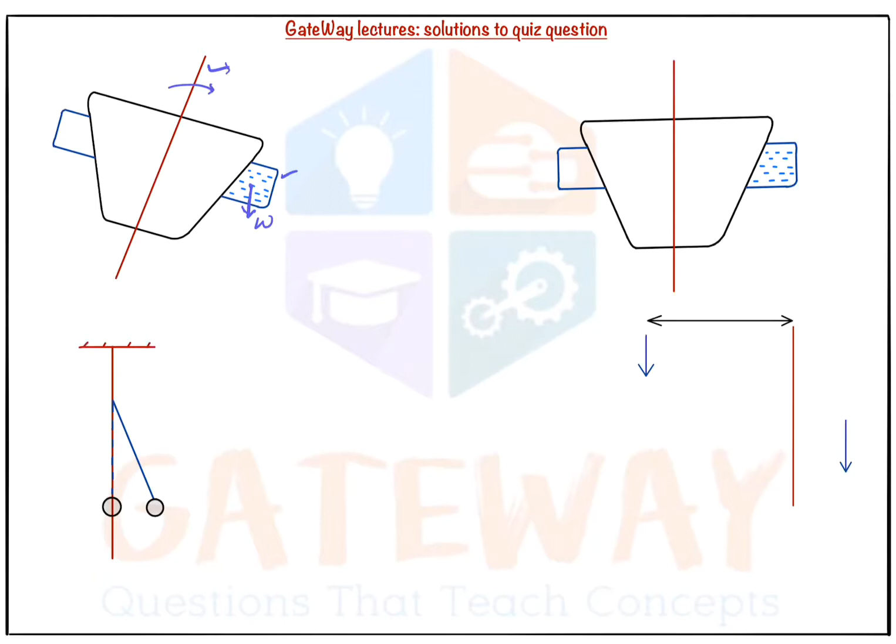The W load is acting due to the water being added. So in a ship there will be something called balancing weights, balancing masses. Those will be placed in the ship to balance this weight, and to avoid the ship completely toppling in this direction, we will add the balancing masses here.

That balancing mass weight also should be equal to W. But why should we add this balancing mass? To just shift the center of gravity.

Now see this condition: this plumb line is attached to the ceiling, and this is the plumb bob. Whenever the ship tilts in this direction, here it will be G. The original center of gravity will be somewhere here, and this is the original metacentric height.

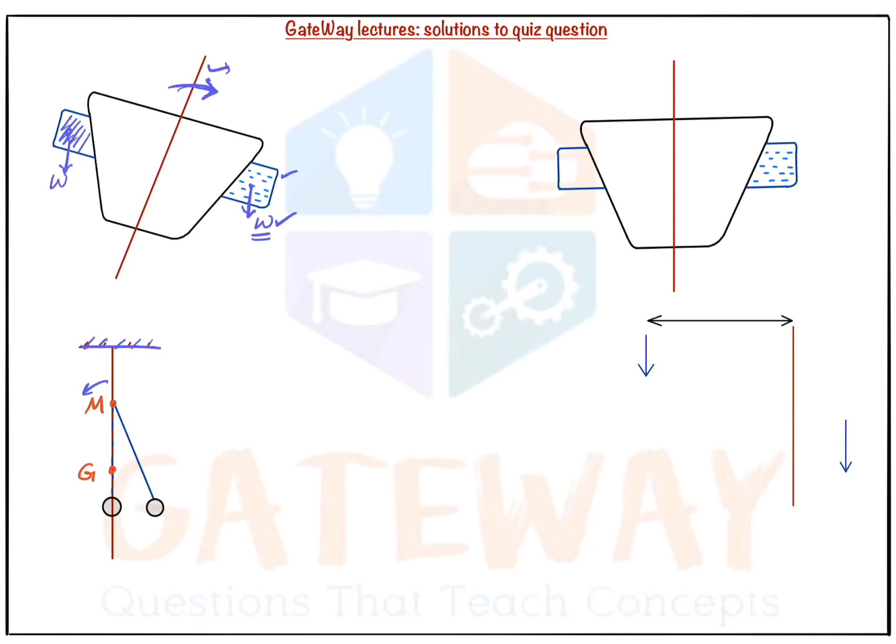Now whenever the bob shifts to this direction, the G also shifts to a point here, and that point is G dash.

So the G varies with the metacentric height, and here this angle given is theta, and this is also angle theta. This is the plumb line shift. The plumb line, nothing but the string, shifts by angle theta, and also our center of gravity will shift from the metacentric height.

Whenever the ship floats, it always tilts about a point, and that point is the metacentric height - that is the actual definition of metacentric height. So here also the G will tilt about the metacentric height, which is fixed. So the G changes with respect to metacentric height to a distance of G dash, shifting to a point called G dash.

Now the complete center of gravity of the body is here, so there are more chances that the ship might topple.

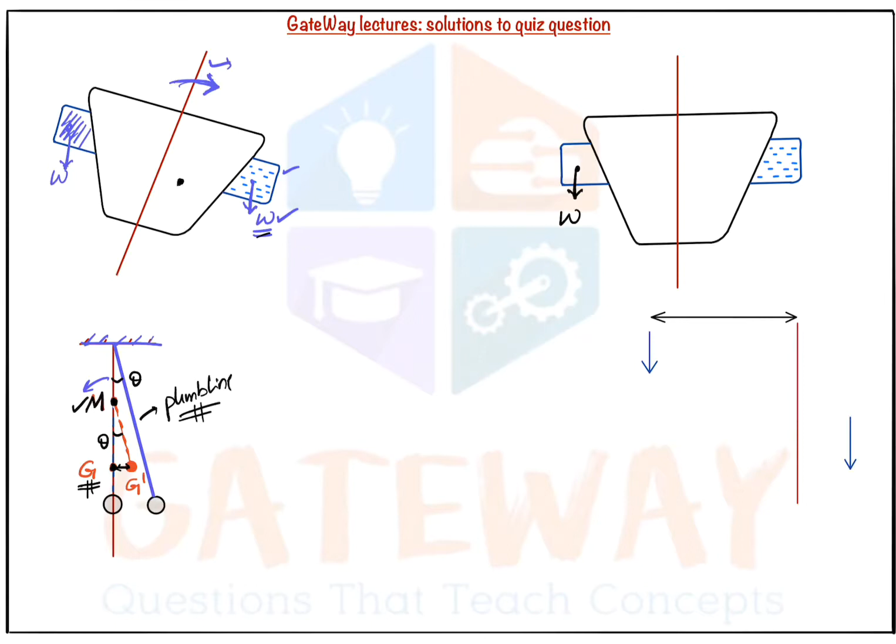So to make it balanced, we attach another weight equal in magnitude to this small w in the opposite direction. In the question, the distance was given as 10 meters from the center of the ship. So now we've added the w weight at a distance of 10 meters.

Here is our G dash, and here is our G. This is our reference axis, just to maintain the moment balance between these.

Whenever G is shifted to G dash, at G only 8,000 tons is acting, but at G dash, 8,000 plus 25 tons of water weight is also acting. This W we are adding is already part of the 8,000 newtons - it is in the ship, they are the balancing masses. So 8,000 plus 25 tons of weight is being added, and this value is equal to 25 tons.

So how will we proceed mathematically? If you observe, let this point be A, let the bob's initial position be B, and this position be C. Now we will apply...

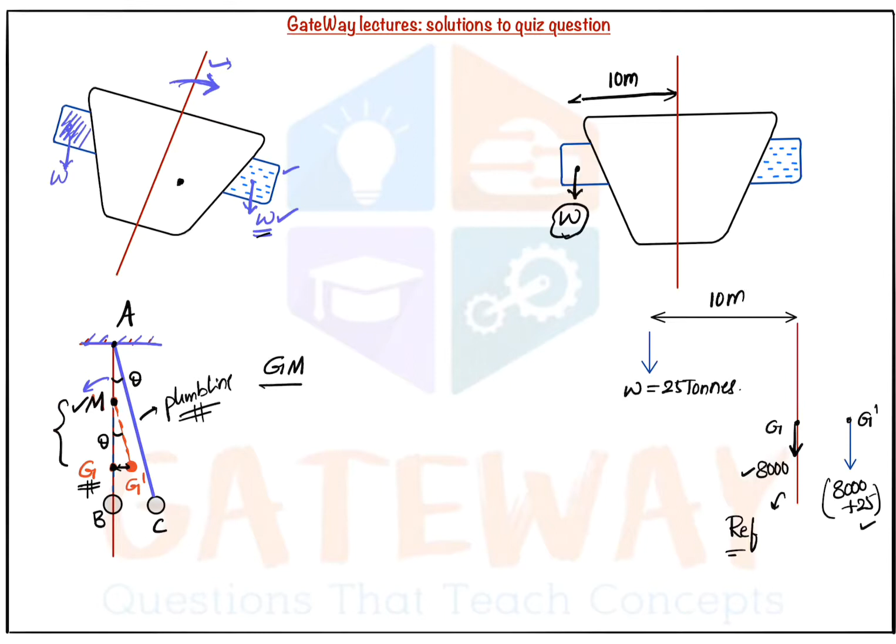GM, nothing but the original metacentric height, upon GG dash, the shift in center of gravity, is equal to AB by similar triangles method, AB upon BC, and this total is equal to 1 by tan theta. If you apply tan theta, you will get the same relation.

Now we need GM and GG dash. Here AB and BC are not known - no dimensions were given. We just need to calculate GM using GG dash, so we can calculate the position of GG dash. From this, GM is equal to GG dash upon tan theta.

Now we will calculate the GG dash value. This is the GG dash. In this question, we will take moment about the reference axis.

Moment about reference axis, this is our reference axis. We'll take moment about that. Here on the left hand side, you can see small w into 10 meters is equal to, on the right hand side, 8000 plus 25, nothing but 8025 into GG dash.

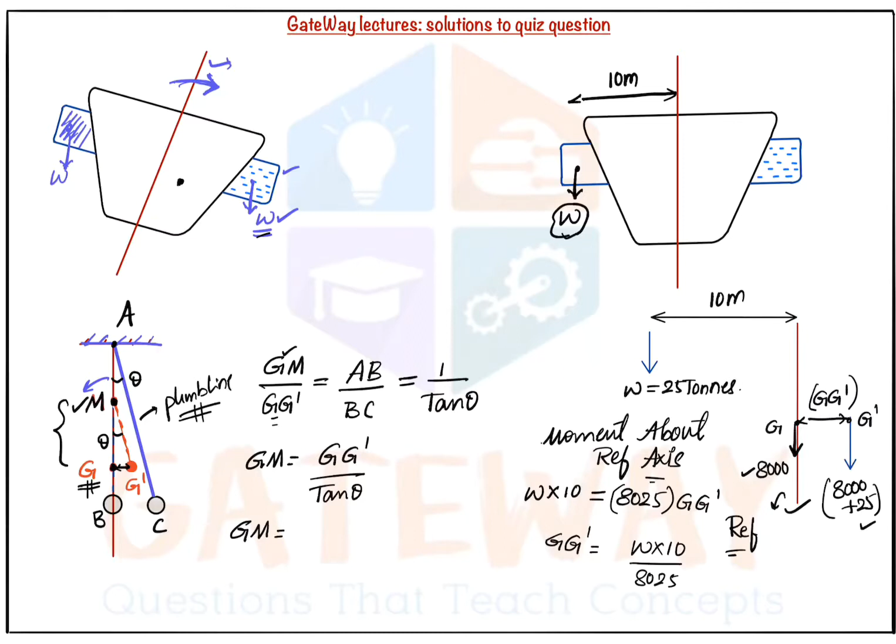So we need to get the value of GG dash from that. W into small w into 10 upon 8025. Here we'll substitute the value of GG dash to get the GM. GG dash is nothing but small w, the value of small w is 25 tons into 10 meters is the distance by 8025 into tan of, the angle was given as

4.87 degrees, tan of 4.87 degrees. So from this we'll get the value of GM, and that value we are getting as 0.36563 meters. This is our answer.

This is a very simple question. Just you need to know the concept of plumb line, what exactly is plumb line and how to get the value of GG dash. That we will be doing it by adding a balancing mass of small w on this side to balance the moment produced by shifting of the center of gravity.

By shifting the center of gravity, there will be a moment produced. To balance that moment, we will be adding an additional small w weight, that is the balancing mass, on the other hand side, to make the ship reference axis vertical.

Next question. The components of velocity in a 2D frictionless incompressible flow are u is equal to t square plus 3y square and v is equal to 3x square. Seeing the question, we can say that the velocity u comma v both are the functions of space and time.

So here our acceleration varies with space and also with time. Our acceleration will have two components here. One will be the convective acceleration component, the other will be the local or temporal acceleration component. For doing that, it is a two-dimensional, and also u and v are given.

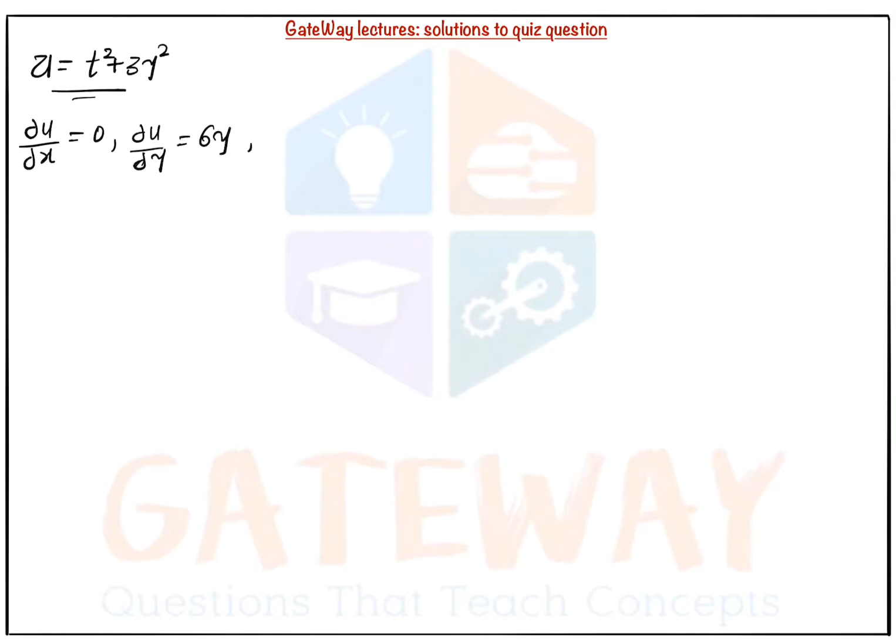So initially we will calculate all the values. For given u is equal to t square plus 3y square. First dou u by dou x, there is no x component, so 0. And dou u by dou y, it is nothing but 6y by differentiating that u. And next dou u by dou z, there is no z component, 0. And dou u by dou t, it is 2 times of t, 2t.

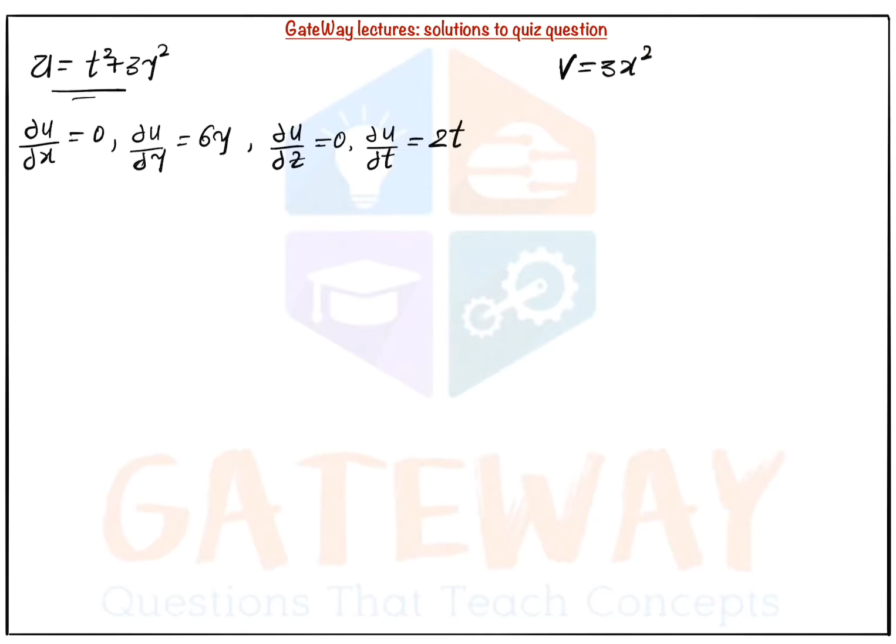And next v is equal to 3x square was given. Then dou v by dou x, 6x. Dou v by dou y, 0. Dou v by dou z, 0. Dou v by dou t, 0. Because there is no y component, there is no z component, there is no time component.

Now we will substitute these values in ax. Ax is equal to u into dou u by dou x.

So u is nothing but t square plus 3y square, into dou u by dou x, which is 0, plus v into dou u by dou y. V is nothing but 3x square. So 3x square into dou u by dou y, which is 6y. Plus, anyhow, w is 0. W component is 0.

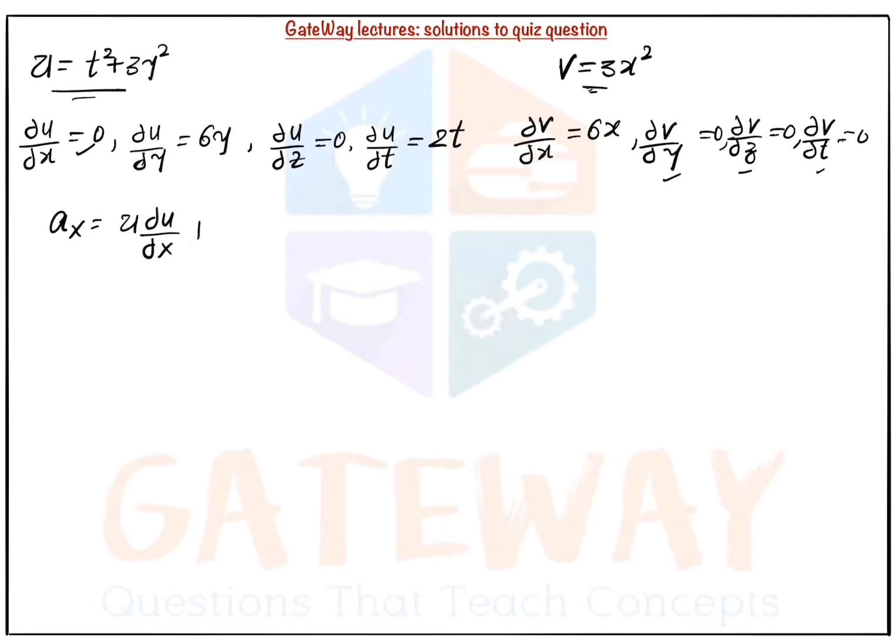Here I'll just write the formula again so that you will not have any confusion. Ax is equal to u into dou u by dou x, plus v into dou u by dou y, plus w into dou u by dou z, plus dou u by dou t.

Here dou u by dou x is 0, so this component gets 0. Here v is existing, dou u by dou y is also existing. Then v is 3x square into dou u by dou y, and here we got it as 6y. And w is 0, dou u by dou z is also 0. Dou u by dou t is 2t. Therefore, plus dou u by dou t is 2t. Therefore our ax, we got it as 18x square y plus 2t.

Keep it aside. Similarly, we will find the value of ay. Ay is nothing but u into dou v by dou x, plus v into dou v by dou y, plus w into dou v by dou z, plus dou v by dou t.

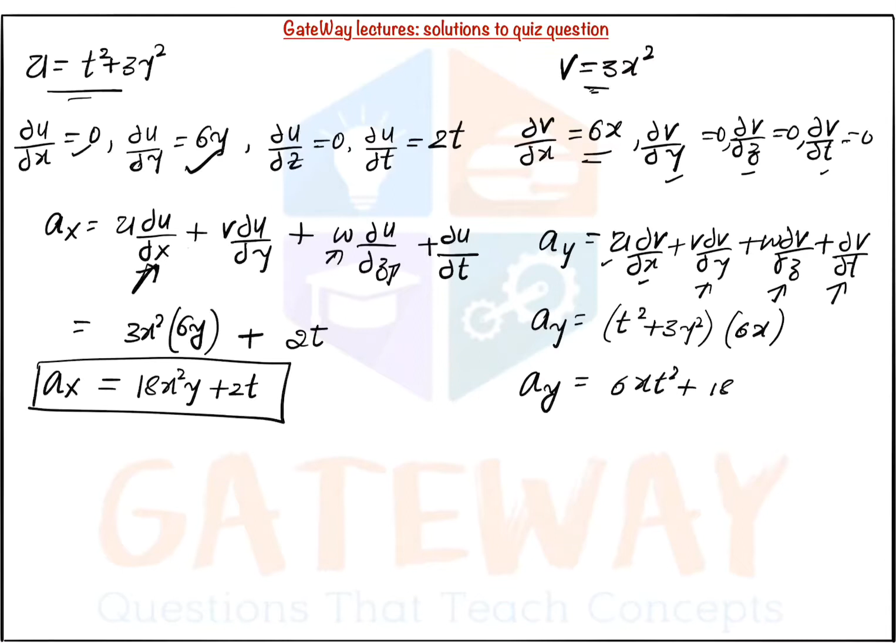Here u is known, dou v by dou x is known, and dou v by dou y is 0, dou v by dou z is 0, dou v by dou t is 0. Therefore ay is equal to u, which is t square plus 3y square, into dou v by dou x, which is 6x. When you simplify this, we'll get the value of ay as 6x t square plus 18x y square.

We need to calculate at the points 1, 0 and t is equal to 0 second. You substitute 1, 0 and t is equal to 0 in both this condition, in both ax and ay. If you substitute in ax, we will get it as 0 because here y is 0, so the y component will be 0, and t is 0, so that will be 0. So ax is equal to 0.

If you substitute the same point in ay, here t is 0 and here y is 0, so here also we will get it as 0. Therefore, the resultant is nothing but 0 meter per second square, and this is our answer.

Next question. In an experiment, the following shear stress and time rate of shear strain values are obtained for a fluid. We don't know exactly what the fluid is, but we did an experiment with the shear stress and time rate of shear strain, and we got a few coordinates. At shear stress of 1 kilopascal, we have a rate of shear strain of 0. And at shear stress of 3 kilopascals, we are getting a rate of shear strain of 2. Similarly in that way. So now we'll do this question.

Before that, we need to understand, if you observe, there is no linear relation between the variation. Here the variation is not linear. 1 and 0, 3 and 2, having no relation, we can't coordinate. Suppose here we are having 1, and here we are having 1; here if we are having 2, and again here if we are having 2; here if we are having 3, and again here if we are having 3 — then we can say that the time rate of shear strain and shear stress are varying linearly. So for linear variation, nothing but directly proportional variation.

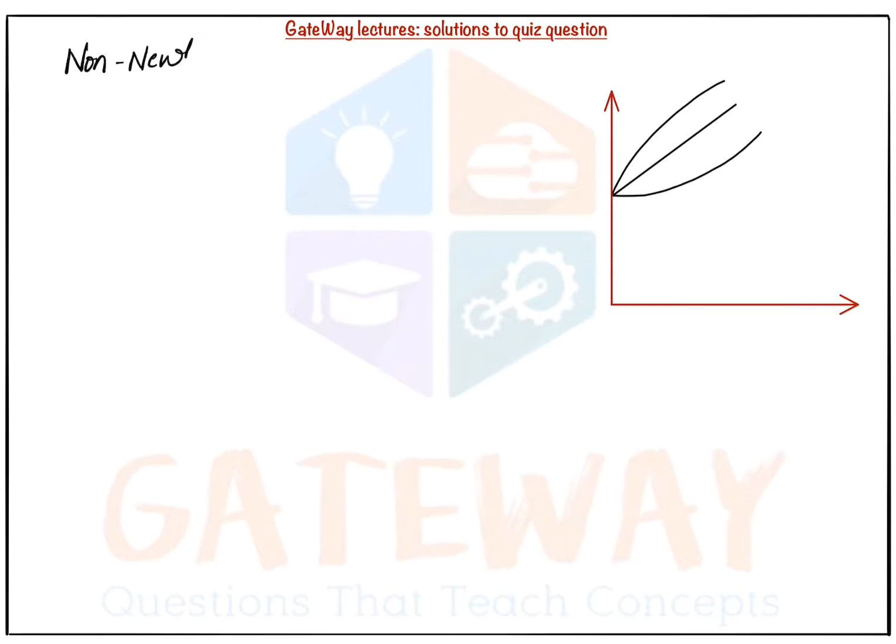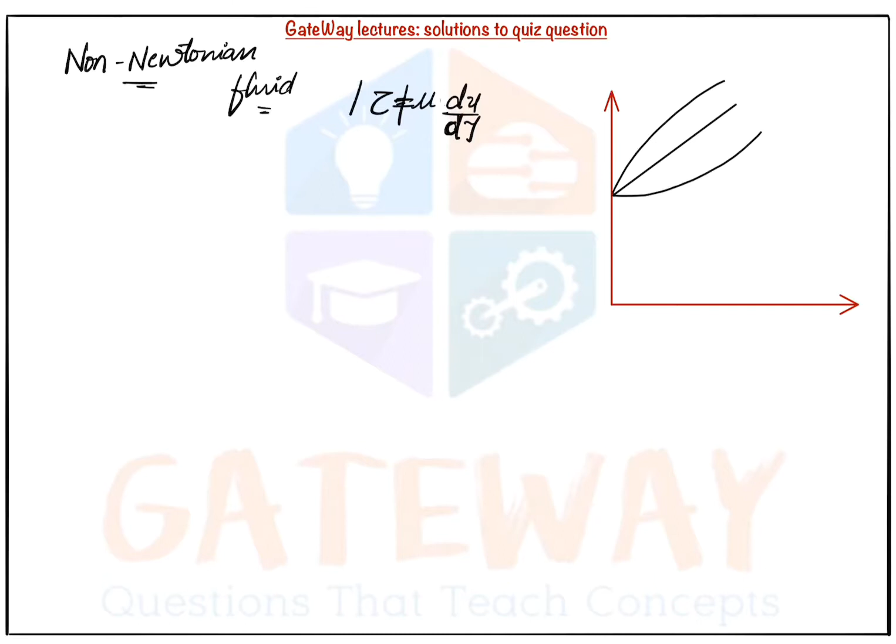So, non-Newtonian fluid — it doesn't obey tau is equal to mu into du by dy. It doesn't obey that. So if it doesn't obey this, then there should be some relation that it obeys instead. That is nothing but tau is equal to tau naught plus mu into (du by dy) whole power n. Here du by dy is called the rate of shear strain, or else it can also be called the velocity gradient.

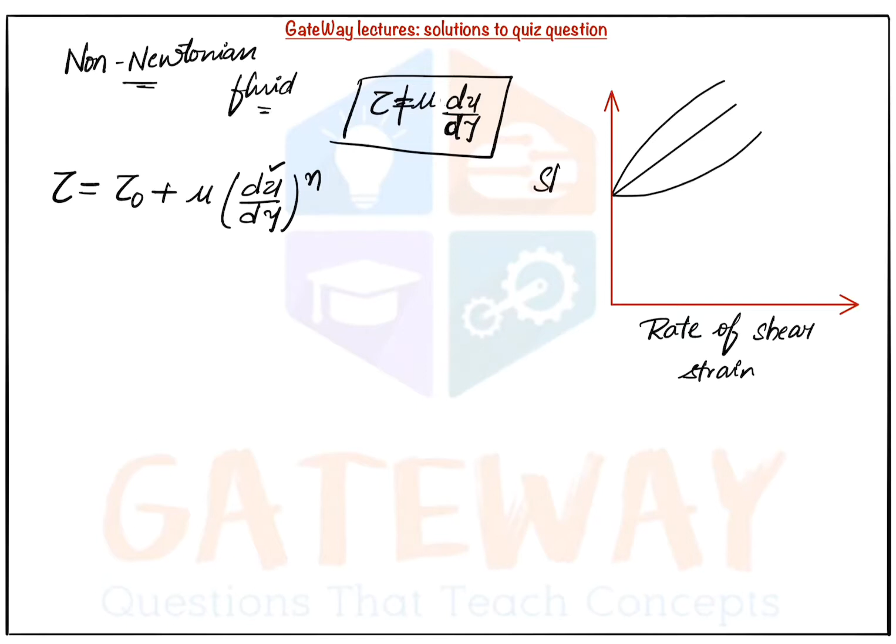Now generally when we do the experiment, we'll also make many plots. So here also we will make one plot. Scientists did experiments and they made a plot between rate of shear strain on the x-axis and shear stress on the y-axis.

For non-Newtonian fluids, scientists identified three types of curves. One is called the ideal plastic curve, and the value from the origin is called tau naught - that is, from the beginning it has some initial shear stress. In our question also, even at rate of shear strain being 0, there is an initial shear stress tau naught not equal to 0, given as 1 kilopascal. So there is a tau naught existing, and through experiments scientists got three types of curves for these non-Newtonian fluids, initially having some shear stress: this curve is called rheopectic, and this curve is called thixotropic.

More on this we will discuss in the concept series, or you can reference a standard textbook. But for this question we need only this information, and in our question the data, the coordinates, were given. Now we will calculate slope at each point. We know how to calculate slope between 2 points - suppose there is a line passing through 2 points on a curve, so how will we calculate it? If the points are x1, y1 and x2, y2, how will we calculate the slope?

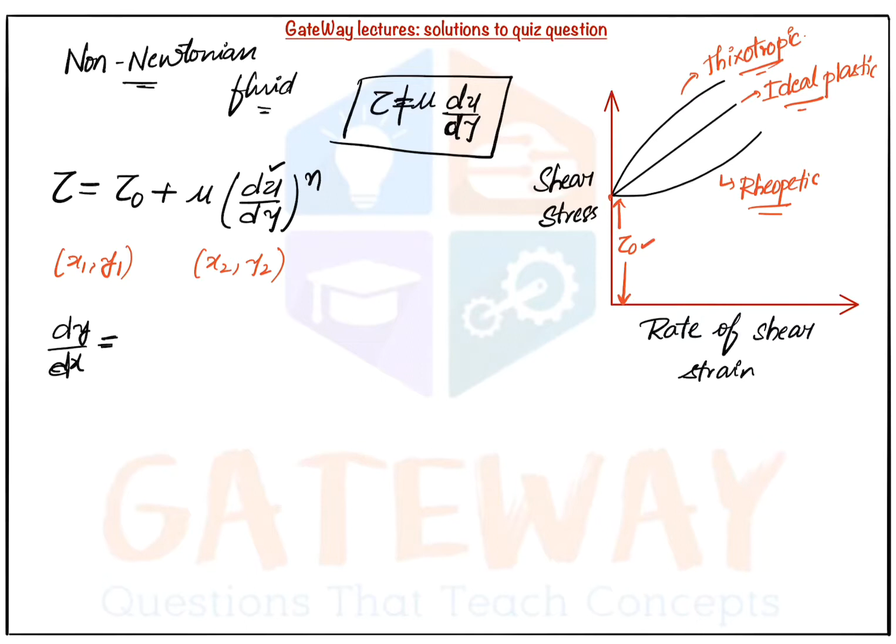Slope is nothing but dy by dx. Here these are defined variables, so we can write them as delta y upon delta x - that is, between 2 points. When we know 2 points on a curve, slope can be written as y2 minus y1 upon x2 minus x1. In the same way, same pattern, we will find the slope between all the 2-point sets.

This is one of our 2-point sets, this is another 2-point set, and this is another 2-point set. All these points lie on the same curve, so we need to calculate slope 3 times. This is our first slope, this is our second slope, and this is our third slope. So we'll calculate the first slope and name it slope 1.

Slope 1 we can calculate as y2 minus y1, that is 3 minus 1, because here y is nothing but shear stress - we take the shear stress component as y and the shear strain component as x. So y2 minus y1 is 3 minus 1, upon x2 minus x1 which is 2 minus 0. That gives us 2 upon 2, which is 1. Similarly, slope at 2 is...

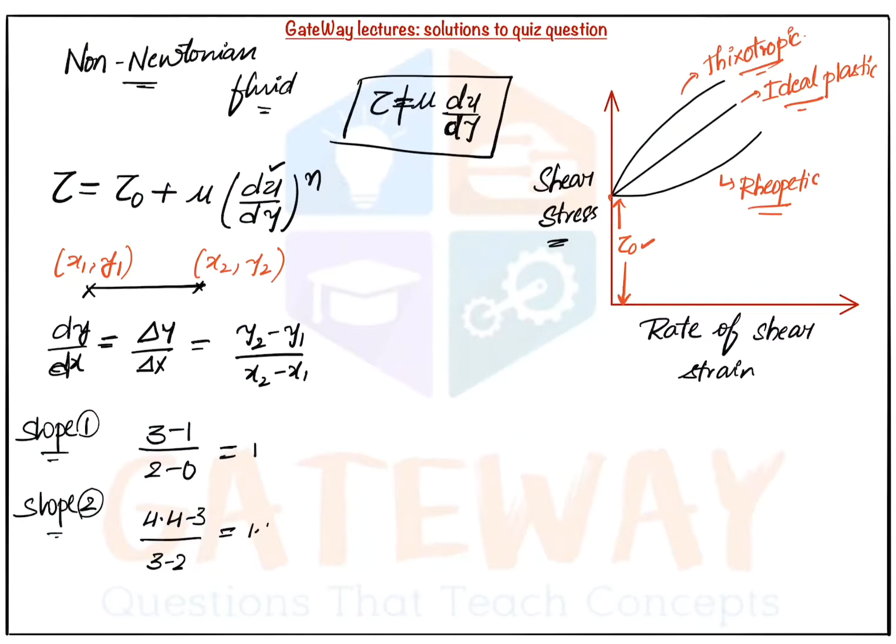4.4 minus 3 upon 3 minus 2 - these are the points. 4.4 minus 3 upon 3 minus 2, and that value we get as 1.4. Similarly, slope at the third point is 6.3 minus 4.4 upon 4 minus 3, and that value we get as 1.9.

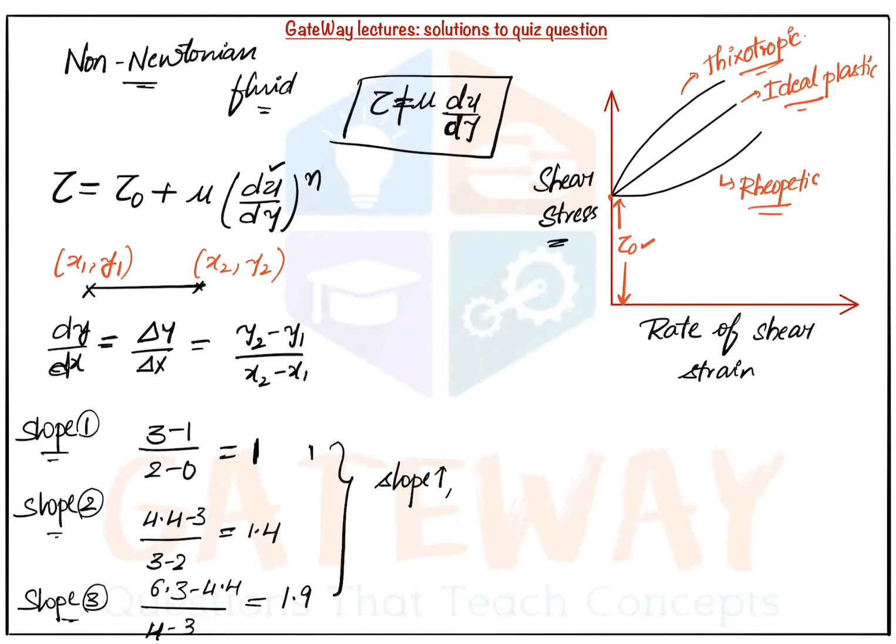So these were the slopes here. If you observe, between each and every point, our slope is increasing. Is it increasing linearly? What does it exactly mean by linearly? Suppose if it is 1 here, then it should be a multiple of that here - or if it is 2 here, then here it should be 4, and here it should be 8. It should have some multiple relationship. But here, if you observe 1, 1.4, 1.9, they don't have any multiple relationship. Therefore, the slope is increasing, but in a non-linear fashion.

Slope is increasing in non-linear fashion, and also for the given condition, tau naught is not equal to 0, and tau naught is nothing but 1 kilopascal. So here is our tau naught value - this is our tau naught, 1 kilopascal.

Now we'll observe the 3 curves here. First, the ideal plastic curve - in the ideal plastic curve, the slope is actually constant. Next, if you observe thixotropic - in thixotropic, the slope at each point is decreasing, so for thixotropic, slope decreases from point to point. But in rheopectic, if you observe, the slope is increasing.

And also it is a curve, it is not a straight line. The slope is increasing, and that is also increasing in a non-linear fashion. Therefore, for our given data and tau naught not equal to 0, our answer will be rheopectic fluid.

What does actually happen in rheopectic fluid? In this fluid, if you can observe, for a small change in the shear stress, there is a large change in shear strain, rate of shear strain. So a small change in shear stress causes a large change in rate of shear strain.

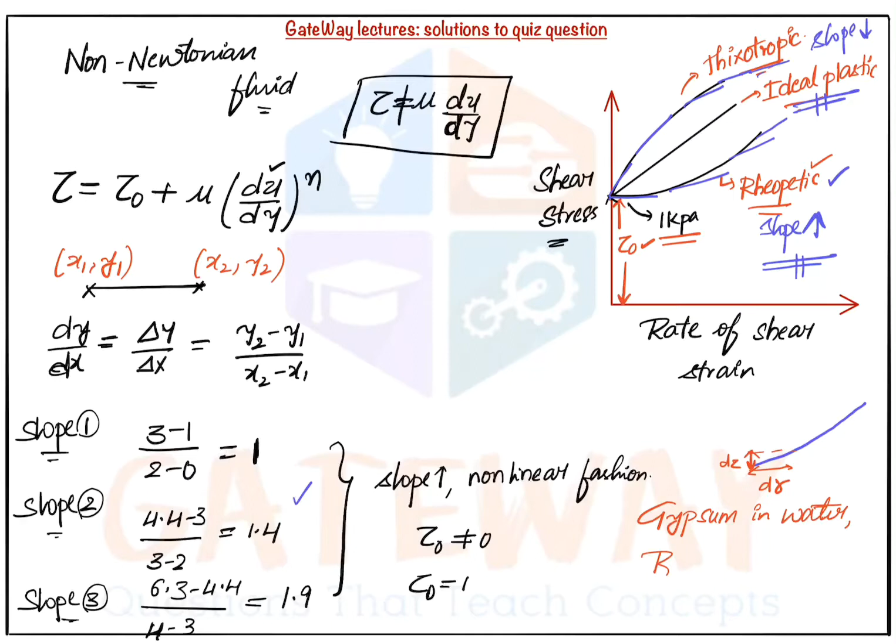And generally we take an example of gypsum in water, and also bentonite solution. These both are examples of rheopectic fluids.

Going to the next question. Question number 4: For the given arrangement, the pressure difference between A and B is - take g equal to 10 meters per second square, and all dimensions are in centimeters. If you observe, it is a case of manometer, and to be exact, a differential manometer.

We need to calculate the pressure difference between two fluids. Here we are having a pipeline carrying fluid A, water, at some pressure and some elevation. And here we are having pipe B, also carrying water, at some pressure and some elevation. We need to calculate the pressure difference between them using the setup of this U-tube manometer, or inclined U-tube manometer.

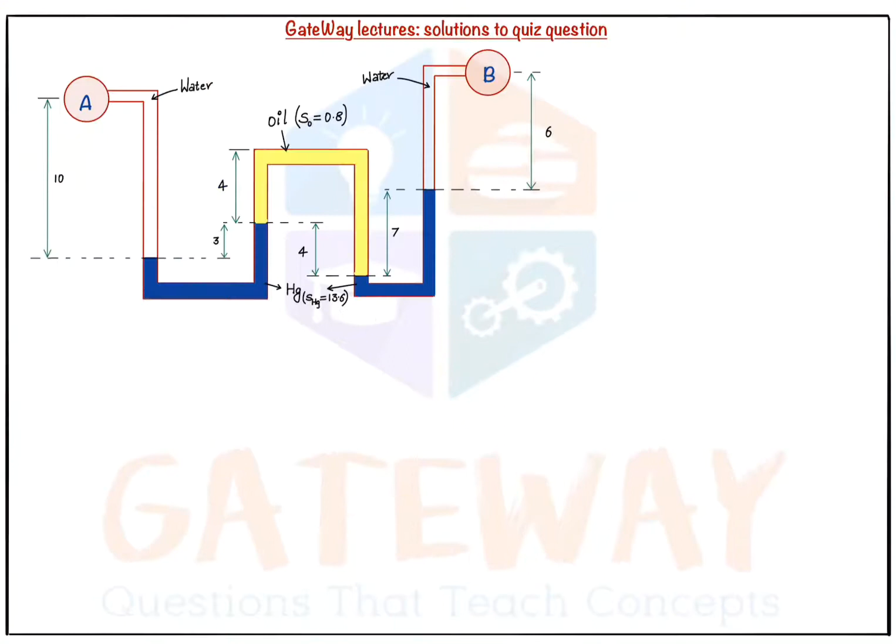For this, there is a very simple technique for differential manometer, called the jumping jack method. What is actually the jumping jack method? This uses the principle of Pascal's law, the principle of fluid statics. It states that in the same fluid at the same height, the pressure will be the same.

Suppose here we are taking mercury - this is our mercury. At this point, traveling in the same fluid, we come to a point where both points are at the same height. So the pressure here is equal to the pressure here - whatever pressure we have at this point should be equal to the pressure at that point.

Similarly, in the case of this oil, at the same height, the pressure at this point and this point will be the same. Similarly here, and also in the same mercury fluid, both pressures are the same. So using this technique, we can apply the jumping jack method here - if the pressures are equal, we need not consider the pressure between those points, since they get cancelled out even if we consider them.

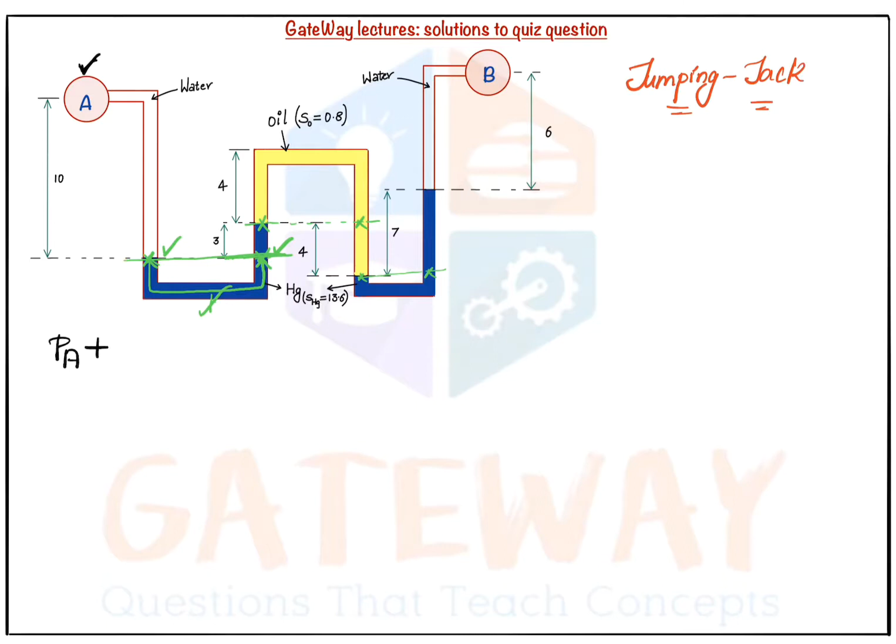So by the jumping jack method, we can simply write PA - whatever pressure we start from here. We know that when moving down in a fluid, pressure increases, so we add the quantity, and when moving up, pressure decreases, so we subtract the quantity. So here, PA plus the water column - the water height is given as 10 centimeters, so 10 by 100 meters, into water density 1000, into acceleration of gravity taken as 10. That finishes the water height term. Next we come to this point.

We need not apply between these 2 points, so we'll neglect those 2 points. Now we'll consider the remaining part.

For moving in this fluid, we need to move in the upward direction. For the upward direction, we know it is negative. So minus 3 upon 100 into, the fluid is mercury. For mercury, density is 13.6 into 1000, and G is 10.

That was finished. Again, we are at this point, and to this point, the pressure was same, so we need not calculate this complete part. We'll directly move from this point to this point, and we'll come to this point. So we need not calculate the pressure in this total value. We'll directly come to this point.

Now we have to move down in this value. Moving down, it is positive 4 upon 100, and that yellow fluid is nothing but oil having specific gravity 0.8 into 1000 into 10. That was finished.

Now again we are at this point. At this point, moving in the same fluid, we need not consider, and we directly arrive. We'll directly jump to this point here.

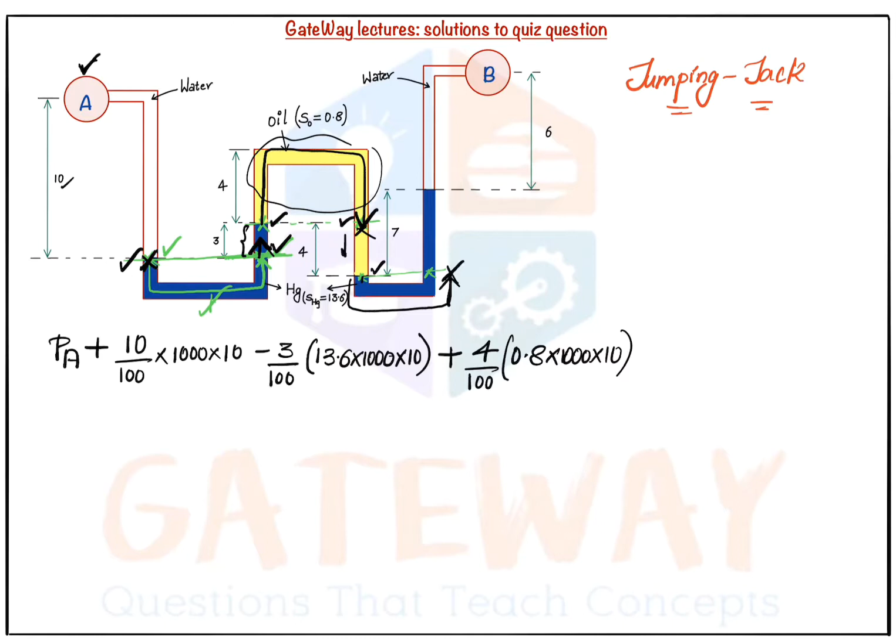Now we are left with this value, and we have to move upward in that fluid to calculate the pressure. Moving upward, it is negative minus 7 by 100, and the fluid is mercury, 13.6 into 1000 into 10. And again we are moving upward in the water, and moving upward is negative, having a value of 6 centimeters.

So 6 by 100 into water is nothing but 1000 into 10, and now that must be equal to PB.

What exactly pressures are we calculating here? This pressure PA and PB are the gauge pressures, because there is no atmospheric contact here. If suppose there is no B here, and if this pipe is open to atmosphere, then the value of PA will be absolute. But here PA and PB are not open to atmosphere. Therefore, these values PA and PB are gauge pressures.

Now we are calculating the gauge pressure difference. So all the values were known. We'll take PA minus PB. You calculate each and every value and subtract and add. Then finally we'll get the value as

12.88 kilopascals. Because everything we've taken in SI units, we'll get the answer in kilopascals.

Next, moving on to the next question, last question. A dam is having a curved surface as shown in the figure below. Width is 1 meter, so into the board it is having some width of 1 meter. Assuming G is equal to 10 meter per second square, the vertical force on the curved surface of the dam is.

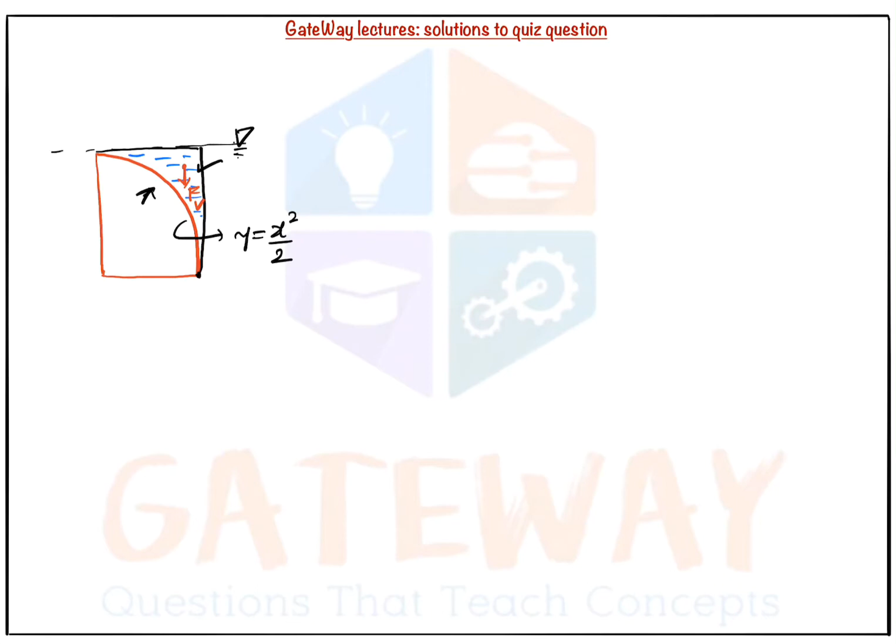So here we can't directly calculate volume, because at each and every length, there is a variation, there is a variation in x, there is a variation in y with respect to x. Therefore, we need to perform integrations here. So how will we do that? Initially, whatever be the curved surface, whatever be the equation, we first have to take an origin point.

Whatever be, here can be origin, it depends on us. So this is our origin, and also important in the question is this is our x direction and this is our y direction. Our origin point is 0,0.

Also in the question, the height of this curved surface is given as 10 meter. If this is our 10 meter, let this point be A and B. So this point coordinate will be 10,0 because this is our x-axis. If this is 10,0, we need to calculate what is the coordinate of y.

We know the curve is varying as y equals x square by 2. We know at this straight line, the value of x is 10, and at this line, the value of x is 0. Therefore at x equals 10, it is nothing but 10 square upon 2, that is equal to 50. So this point comes out to be 10, 50.

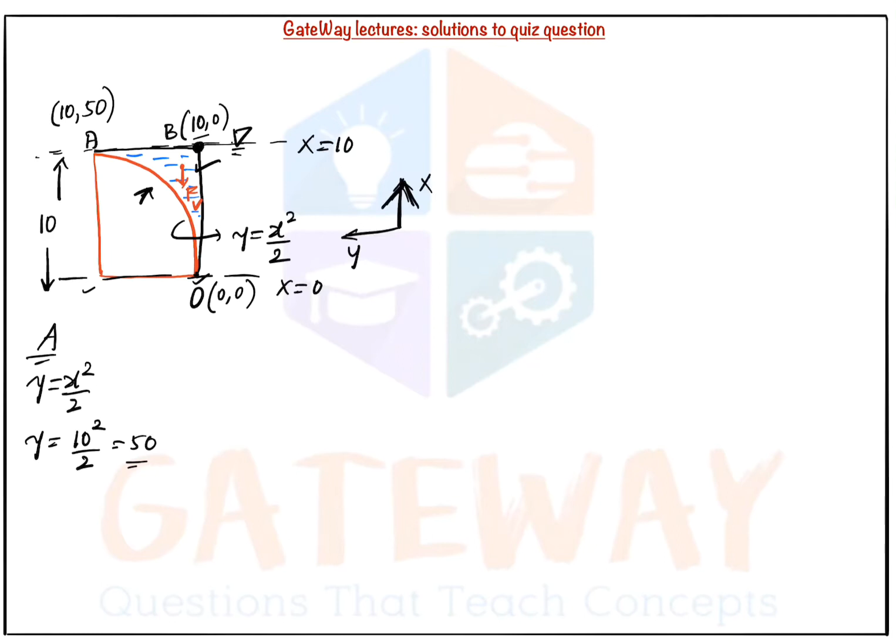Now we need to apply integration to calculate the volume. So we'll take a differential element in the curved surface, in this way. This is our dx, and this is our dy. So for the differential element, what will be the volume?

dv is nothing but d area into the width. Width is nothing but, given in the question, 1 meter. So therefore our dv is nothing but dA. And what is dA? dA for the differential element is dx into dy.

Now here we'll apply integration on both sides. But for dx into dy, we need to apply multiple integrals because there is a variation in x and also variation in y. So it is a double integral because we are calculating area, and for area we need to do surface integral or the double integral.

So when we integrate dv, it is nothing but v. And when we integrate for dx and dy, we need to specify the limits here. So if you can observe, our x is varying from 0 to 10.

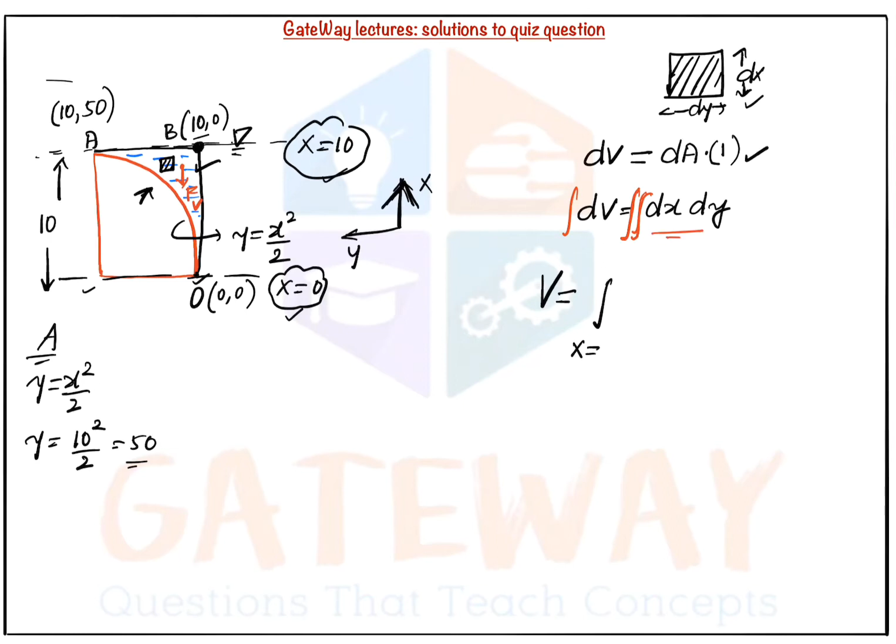Since the x values were known, 0 and 10, we can directly substitute the values finally in integration. To keep that as the second integral, we'll place the integral outside with the limits x equals 0 to x equals 10.

Here when x is equal to 0, our y is also nothing but x square by 2, which will also be equal to 0. And here the y value is varying with x square by 2. So here it is y equals 0 to y equals x square upon 2, dy, because here we are taking y limits, and the total of dx.

So we'll simplify that. Then, with x equals 0 to x equals 10, integral dy is nothing but y. For that y we substitute the upper limit x square by 2, then it will be x squared by 2. Lower limit is 0, we need not substitute, into dx. Now again we simplify this. It is x cube upon 6 with the limits 0 to 10. From that we'll get the value of volume as 1000 by 6.

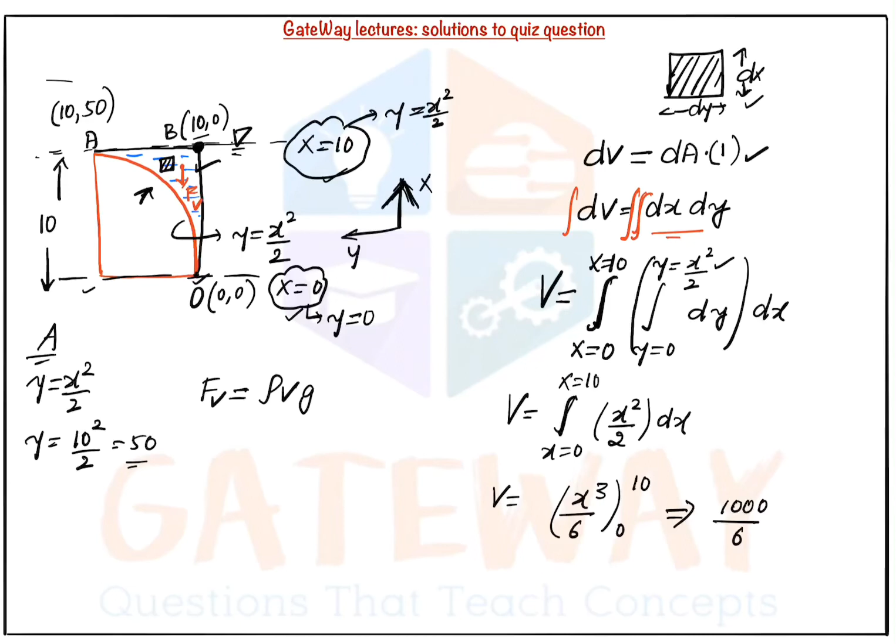The force vertical on the curved surface is the weight contained by the fluid on the curved surface up to the free surface. So Fv equals weight, which is nothing but rho Vg. Rho here is water, so 1000 into the volume, which we got as 1000 upon 6, into acceleration of gravity taken as 10. The answer will be 1.667 into 10 power 6 newtons, or else 1.667 mega newtons.

We'll also take many of these type of curved questions because they are a little critical. Mostly in hydrostatic forces, curved surfaces have the most importance for understanding the concept. Flat surfaces are very simple, we apply a direct formula, F equals WAX bar, X bar can be calculated, so we can easily do flat surface questions. In curved surface questions, many will have confusions, so we'll do many such quiz questions, conceptual questions on curved surfaces.